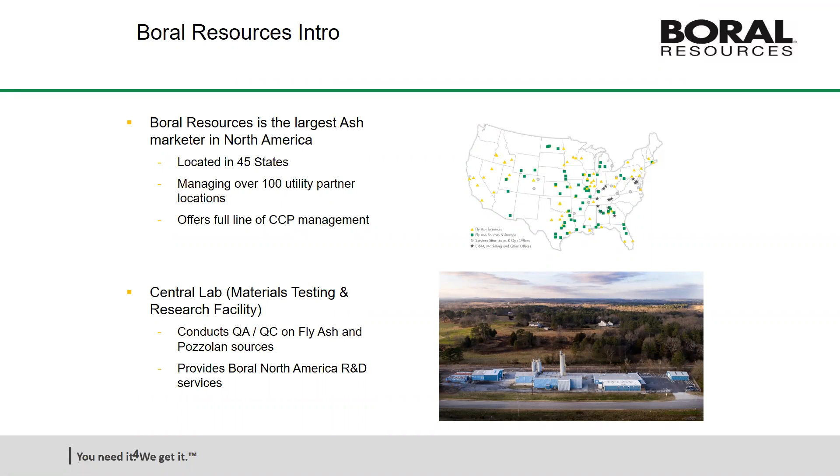Somebody's got some background there. I don't know if everybody's hearing me okay.

We conduct all the QA/QC on the fly ash and any pozzolan sources we have in North America. Also, it houses our R&D department, which is in charge of looking at new sources, harvesting potentials, and beneficiation of marginal or unusable ashes by process. When we talk about the use of fly ash in concrete, typically it's between 10 and 15, maybe 25%, depending on the application and desired properties.

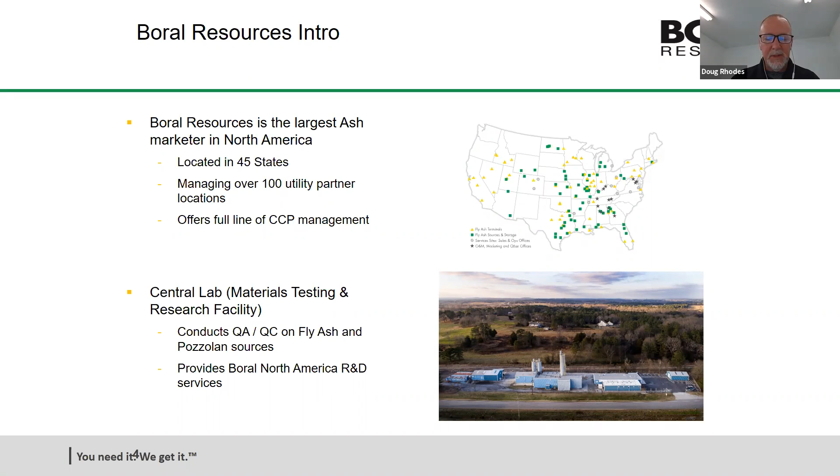If you don't know anything about fly ash, it provides a lot of durability attributes to the end product in the arena of sulfate soundness, ASR reduction, or just decreased permeability if that's what you're looking for. Carbon emissions are reduced proportionately to the replacement of the Portland cement in the concrete. And I got a little bit of a description on the next slide.

Well, you probably heard there's no fly ash, or fly ash is running out. We can't get fly ash. Well, yeah, that's true. And in some regional areas, there are intermittent supplies.

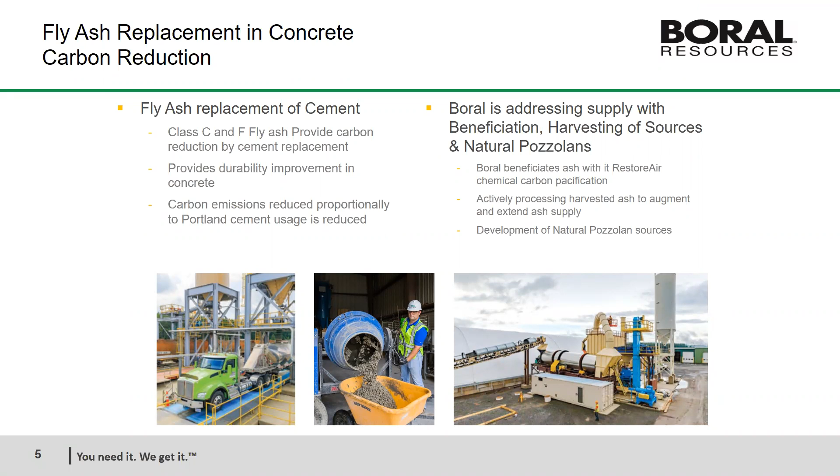Boral has been working for the last 5 to 10 years to secure harvesting sites, promote some natural pozzolan sources, and also working with beneficiation processes where we have a higher carbon content in ash, and we use a proprietary chemical called RestoreAir to render that carbon inert and allow its use in concrete.

And to the harvesting point, we've got 2 active harvest sites in North America that are working right now, and we're developing a natural pozzolan source in Arizona, and looking at several locations where that could be utilized.

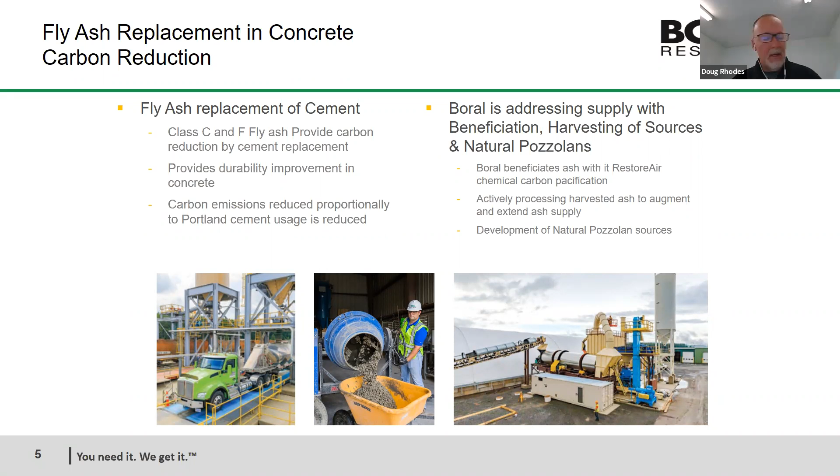Yeah, thank you for whoever's clicking that slide for me.

This is a sustainability report, kind of the big bullet points from our 2019. Our year goes June to June, so the next one will be out soon. In 2019, we sold roughly 7 million tons of fly ash, and the replacement factor is generally 1-to-1 with cement. Sometimes it's a little bit of a different ratio, but typically it's in that arena. If you're a concrete guy, the volumetric stuff comes into the equation.

On that basis, 1 ton of cement will produce 1 ton of carbon emissions from the Portland cement replacement. So for every million tons we can bring to market, replacing it on a 1-to-1 basis, with Portland cement with fly ash, we can avoid 0.7 to 1 million tons of CO2 emitted. Again, our strategy is to increase the amount of pozzolans available to you, whether it's fly ash or natural pozzolans, to replace that Portland cement on a 1-to-1 basis or whatever the ratio is.

There are challenges that surround that from a business standpoint. It's very capital intensive. If you're having to mill a material, like in a natural pozzolan scenario, the mills are quite expensive. The facility we're building in Arizona is going to have a very high volume output. That's to be determined after a couple more studies, but it should supply a great deal of pozzolan over the expected 25 to 30 year lifespan.

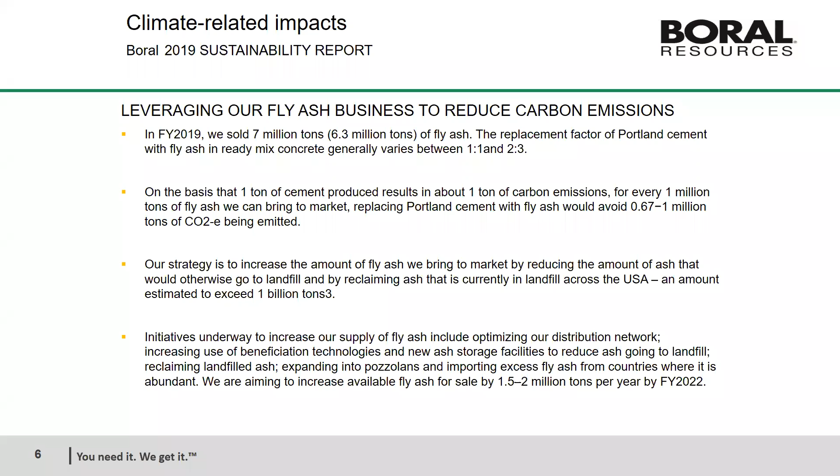So our goal is to increase the amount of pozzolans that we sell year over year, and our R&D department's working hand in glove with our sales staff to make sure that they can handle what we produce. And I think I've got about 30 seconds left, so that's kind of where I'm at.

Very good, Doug. Thank you. One comment for everybody on the call: fly ash. One role that everybody here can play, because we all want to be end users of fly ash, is to put a little pressure on these private industry companies to consider beneficiating their ash versus landfilling it, and working with companies like Doug's to put that technology in place.

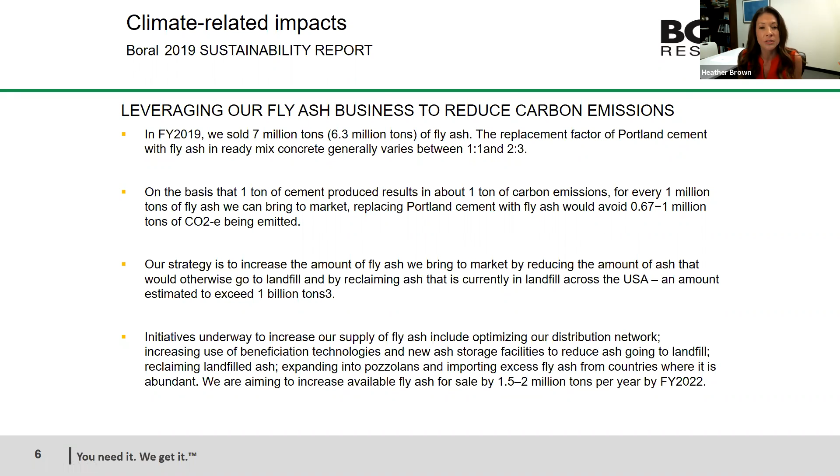The technology exists, the equipment exists to convert, let's say, bad ash to good ash, if you will. And it's companies like Boral that are out there looking for sources. It's easy for a private industry to build a landfill and just kind of do away with the problem immediately. So just wanted to comment there.

Thank you. Yeah, it's tough to dive into the weeds with 7 minutes. Thank you so much, Doug.

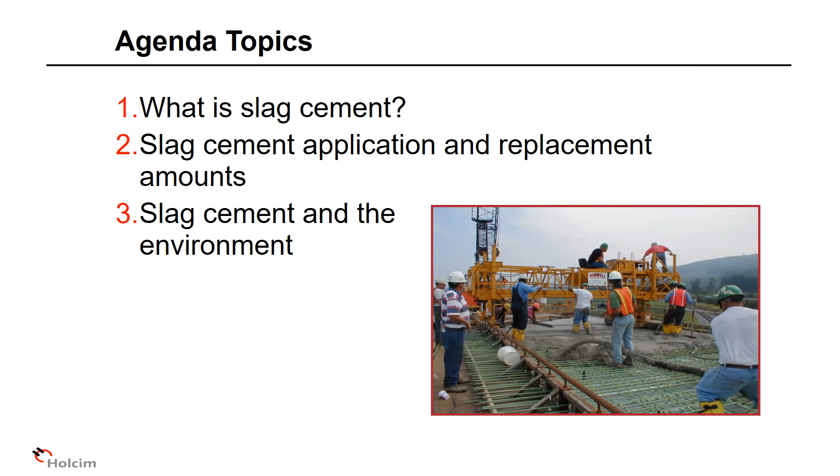One of the products we market in the area is slag cement, and the product is made in South Chicago and brought to Nashville by barge to our terminals. I'd like to hit on a couple things. What is slag cement? Slag cement in concrete, and then how does it affect the environment?

So the main thing about slag cement is it is a byproduct of iron production. It's the product that comes off the top during iron production. The product is then quenched and then ground to a fine powder.

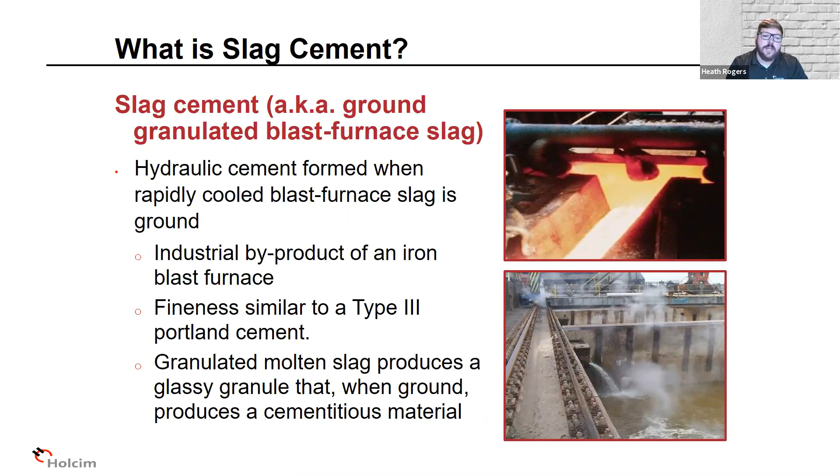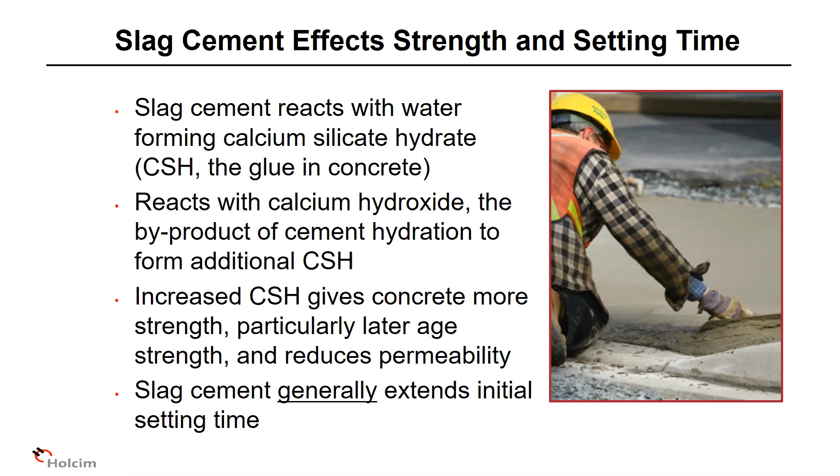Slag cement can then be used in concrete to replace some of the Portland cement in the mixture. So when you look at Portland cement in really small detail, basically whenever water hits it, it grows fingers, and that's how it gains strength. It grows this calcium silicate hydrate, and all that interlocks with the aggregate and the other cement around it.

Slag cement has the same mechanism. It grows these calcium silicate hydrate fingers, and there's also some synergies with the Portland that is available. So you get a nice, dense, strong paste structure when using slag cement.

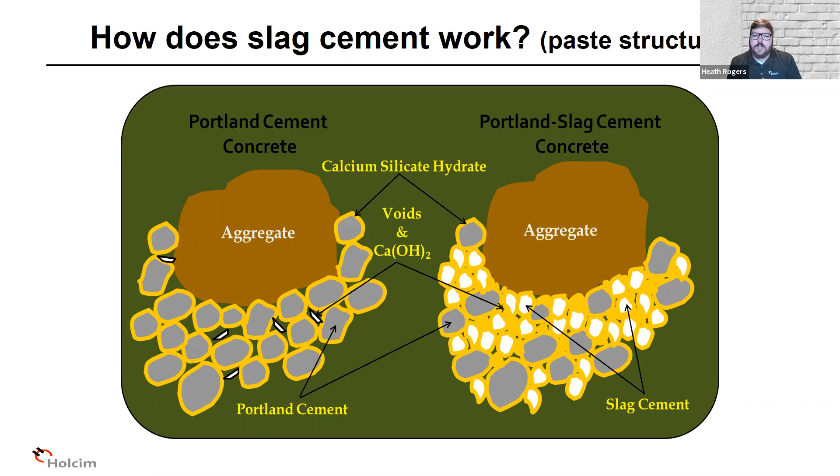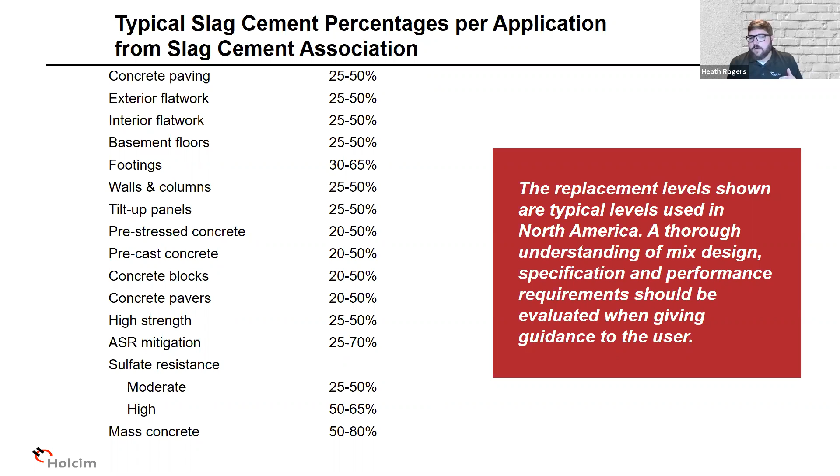So how's it used in concrete? The Slag Cement Association put out a chart basically showing typical usage in certain types of mixes. So the main thing I would like you to take away from this is slag cement is flexible. It's not a one-size-fits-all approach to different concrete mixes. It can be adjusted depending on the properties that you're seeking. So you can go with a smaller amount for concrete paving or a much higher amount for mass concrete, depending on the properties that you're looking for.

So how does slag cement help the environment? The main thing would be you are able to reduce virgin material usage. You can divert an industrial waste byproduct from the waste stream and improve service life, which is that durability, strong paste matrix that we talked about. And then we can reduce the embodied energy and greenhouse gas emissions and lighten the color of concrete.

So that lighter color of concrete comes into play when you're looking at LEED design and also the heat island effect of concrete in urban areas. So it's more reflective of the heat that is coming in. So let's look a little bit closer at reducing the embodied energy. Next slide, please.

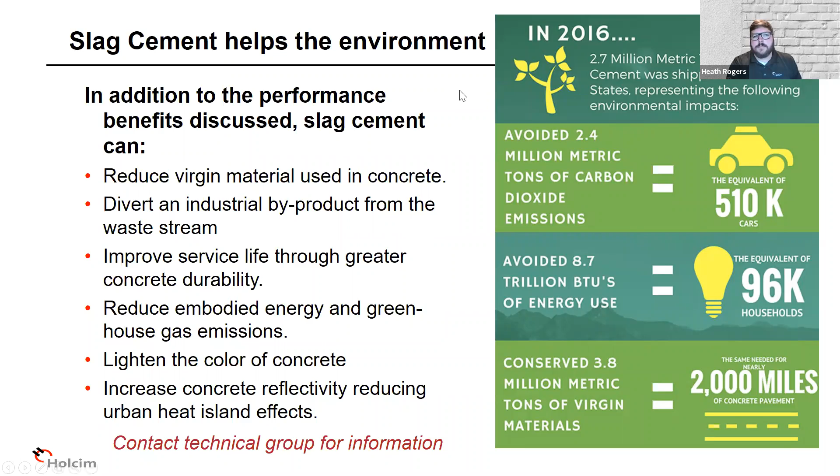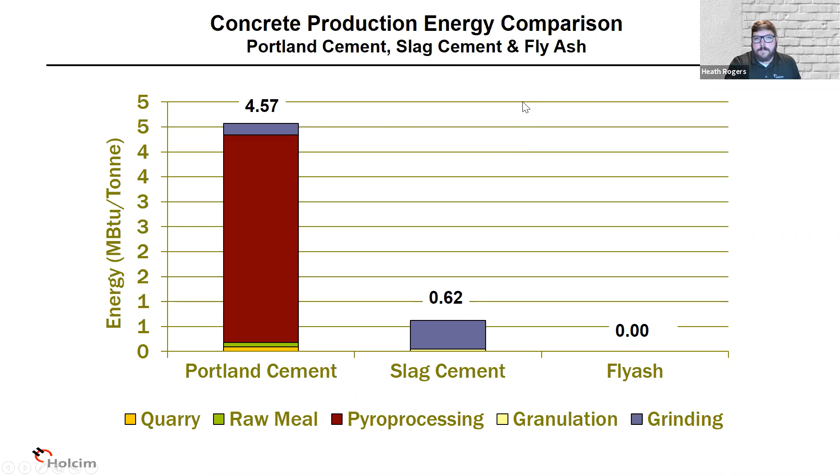So the Slag Cement Association did some testing. They put together 4 concrete mixes and how much energy was used to make those concrete mixes, the total energy used. They looked at a 3,000 PSI, a 5,000 PSI, and a 7,500 PSI precast mix, and then a block mix. If you go to the next slide,

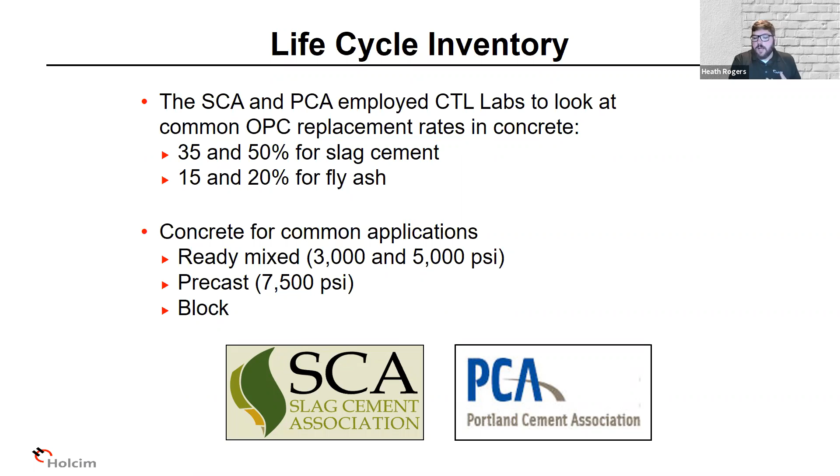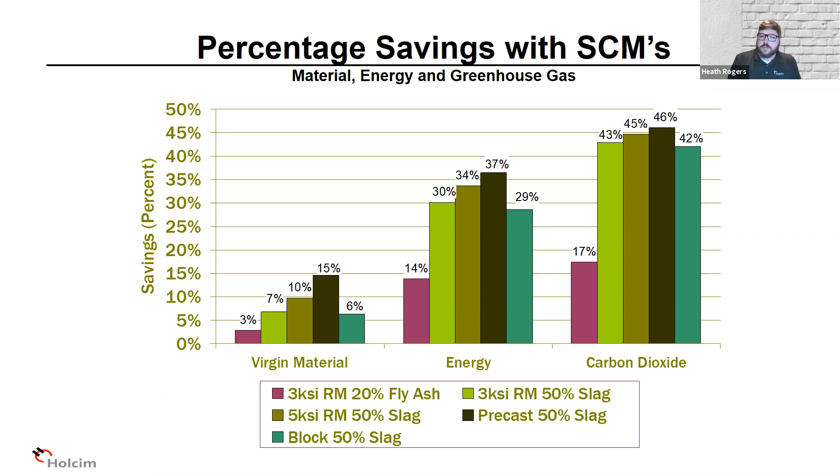you can see basically the savings of virgin material, energy, and carbon dioxide by replacing some of the Portland cement with a supplementary cementitious material. This chart is showing fly ash and slag; there are other things you can do, as we're going to talk about today.

If you would like to do a little bit more research, the Slag Cement Association has some great information on their website, slagcement.org. Two key places I'd like you to look: the sustainability tab, next slide please, has a life cycle assessment calculator. It has LEED certification information and an environmental product declaration, an EPD, for slag. So that's somewhere good to go for some of the information we're talking about today.

Second, the resources tab shows the slag cement information sheets. Next slide, please. It has 2 to 3 page documents about a lot of different information that relates to slag cement. So if you've got a question about slag, how it would play into concrete, how it would interact with something, this is a great resource to start. You can also contact me if you have any questions.

So thanks. Thank you, Heath. That was wonderful on the resources. I appreciate the extra science insight too. Look at you talking about calcium silicate hydrate.

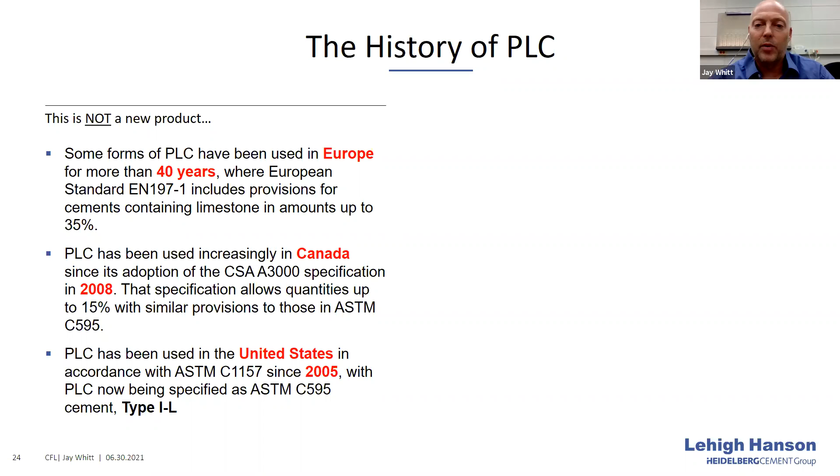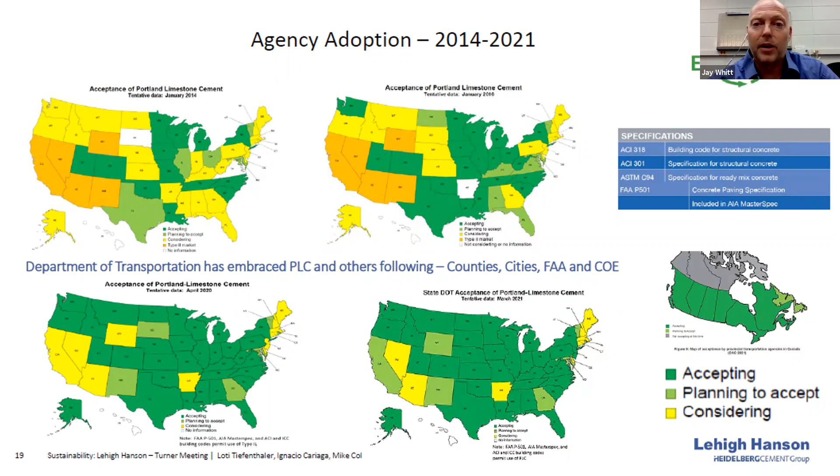If we look to our neighbors in the north in Canada, they have fully embraced this, such that we have one particular plant where all they produce is a type 1L cement. And projects moving forward that are federally funded in Canada have to implement type 1L.

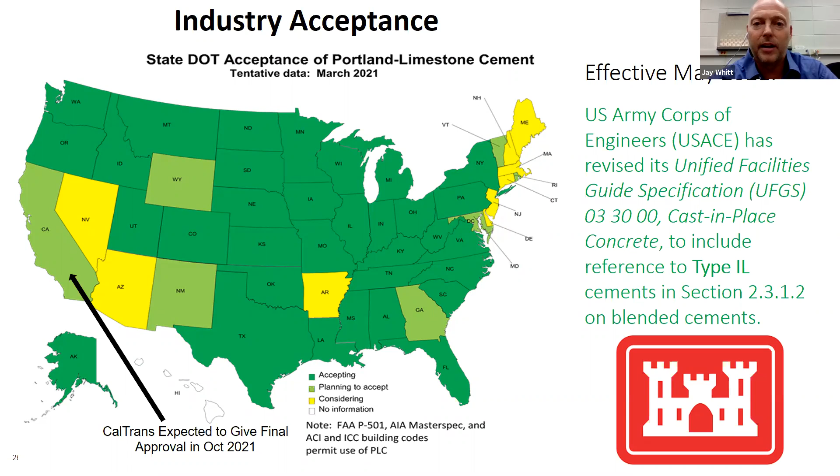One other note here, the Army Corps has embraced it here just recently in May. And then in California, they are almost on board. They have finished some research they've done, and in October, we expect to see that in their specifications.

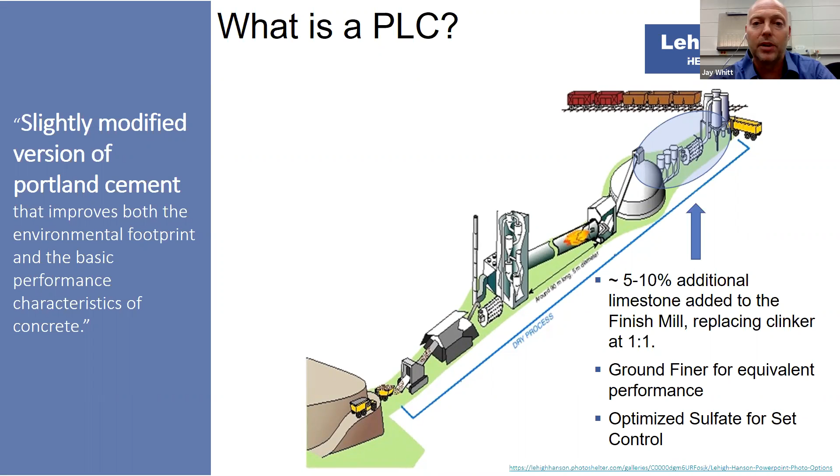So really, what is PLC, Portland limestone cement? You may hear it that way, or you may hear it as a Type 1L. It's a slightly modified version of our Portland cement. And what do I mean by slightly modified? Well, we're actually adding increased limestone percentage, about 5 to 10% in there. We're grinding it a little bit finer, but we're putting this into the process at the finish mills in the cement manufacturer. We're optimizing sulfate for set, and we're ready to go.

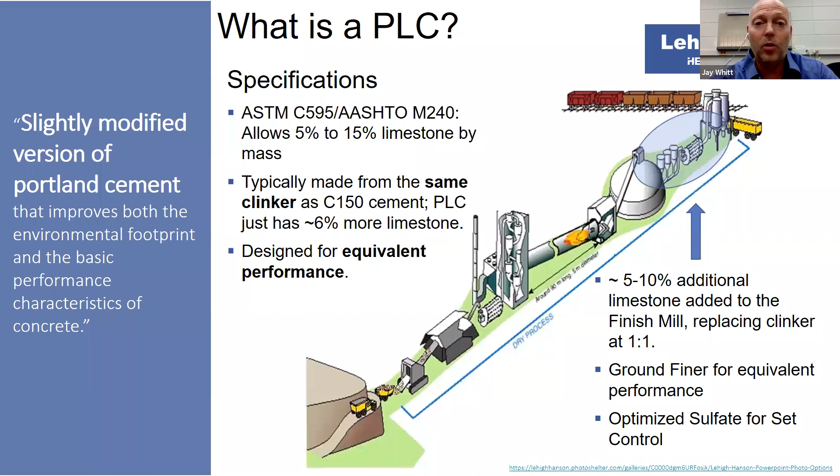Where are you going to see these specifications? ASTM C595 and AASHTO M240. And where are the clinkers coming from? Well, we're using the same clinker we're using for Type 1. Our main goal as a cement manufacturer is to have equivalent performance.

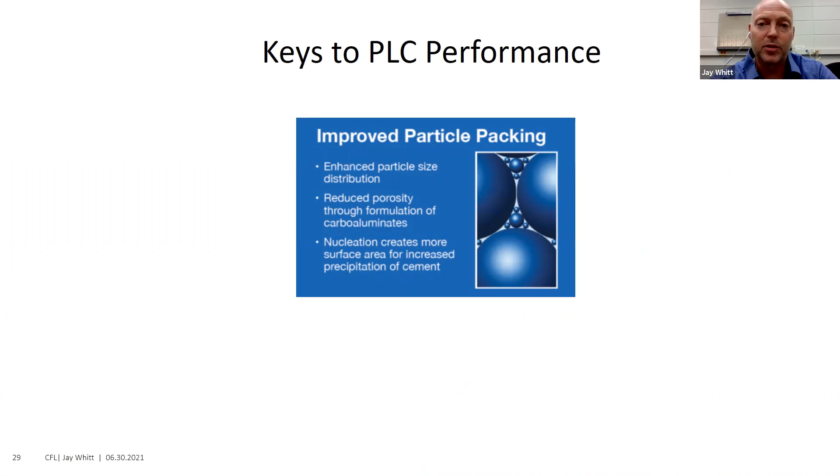And how do we do this? There's basically 3 mechanisms that we look towards. One is particle size. The other 2 are based upon chemistry and how the interaction happens at that micro level. From particle size, it's real easy to get caught up in this, but limestone is a little bit easier to grind and allows us greater distribution, which greatly helps not only the finish from a physical point of view, but also from a chemistry point of view. From a chemistry point of view, we can get really into detail, but the carboaluminates are going to help with the hydration of that cement.

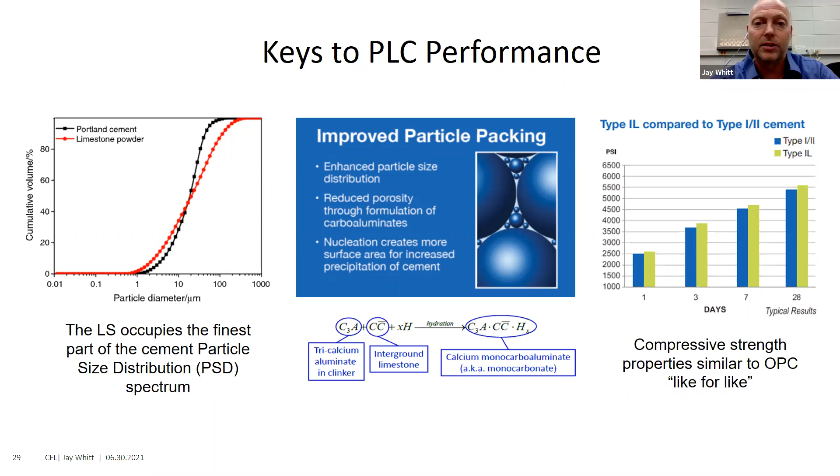What's it look like strength-wise? Most people, when they refer to it, mean compressive strength. Well, we got very similar results, and we use this term like-for-like, and it's not just the compressive strength, but also flexural strengths and all the durability testing, as far as shrinkage, ASR, and sulfate resistance. We are seeing a like-for-like performance.

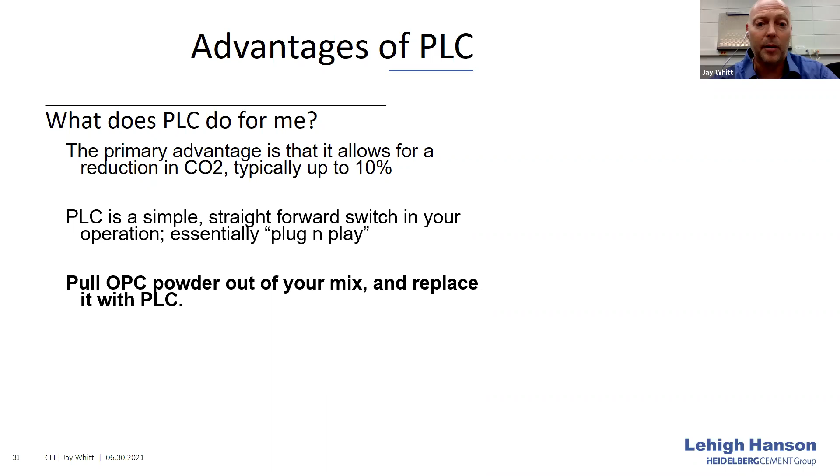What kind of advantages does this Type 1L give us? Well, the primary advantage is we're reducing our CO2. We are reducing that carbon footprint, typically up to 9 to 10%. But the practical side of me asks, what are the ready mix guys looking at? How do they change this? We like this because they're simply using the same material, the same equipment, the same batch programs, the same mix design. We may only see a slight change in our admixture dosage, but other than that, it's a plug and play aspect. There's no new equipment needed for this.

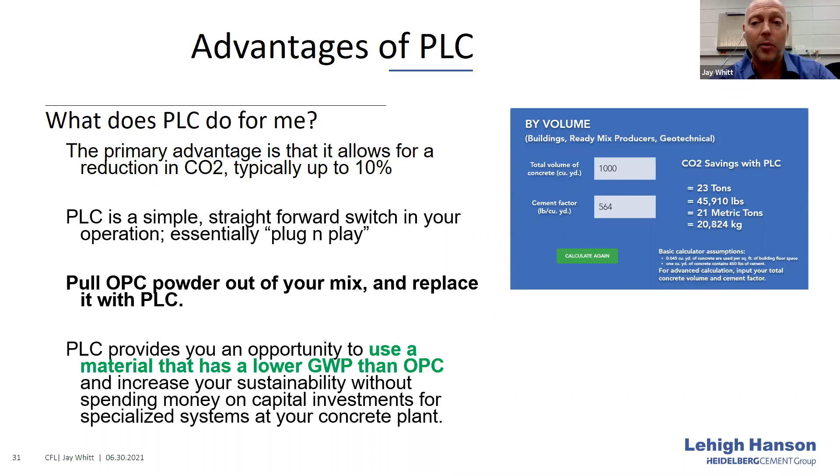So the next concept we talk about is GWP. Well, how do we quantify that? What gets measured gets improved. On a website called greenercement.com, we're able to adjust and modify and see the comparison. In this comparison off to the right is a 564 mix. We actually saved 21 metric tons using the Type 1L. Well, what does that really mean? To me, you've got to quantify it over several years. They quantified it over 2012 to 2018. We actually took 70,000 passenger vehicles off the road by using this product.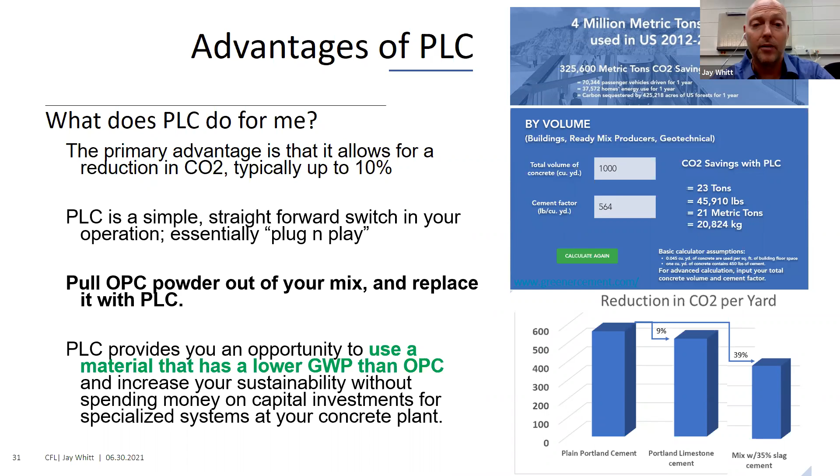Where are we using this? We, as Lehigh, have already implemented projects; we've got one dating back to 2010 where we have a terminal and silos built. We have roads that have been in existence since 2010. There's one in Iowa and in the Denver, Colorado area where we have seen this product already being implemented.

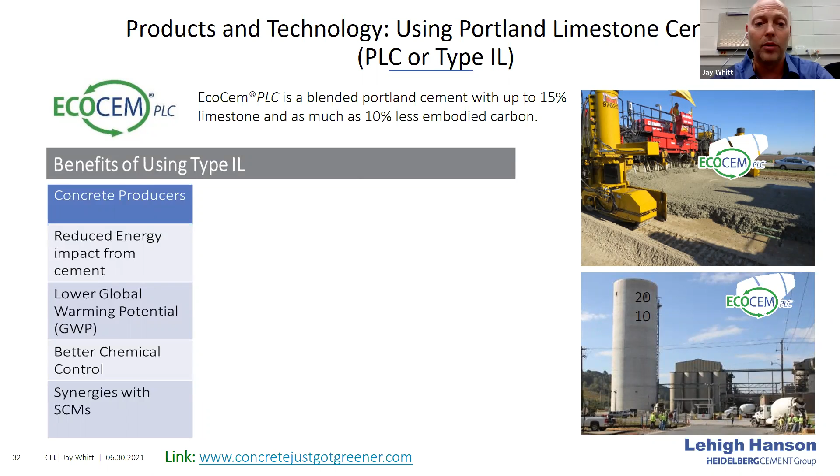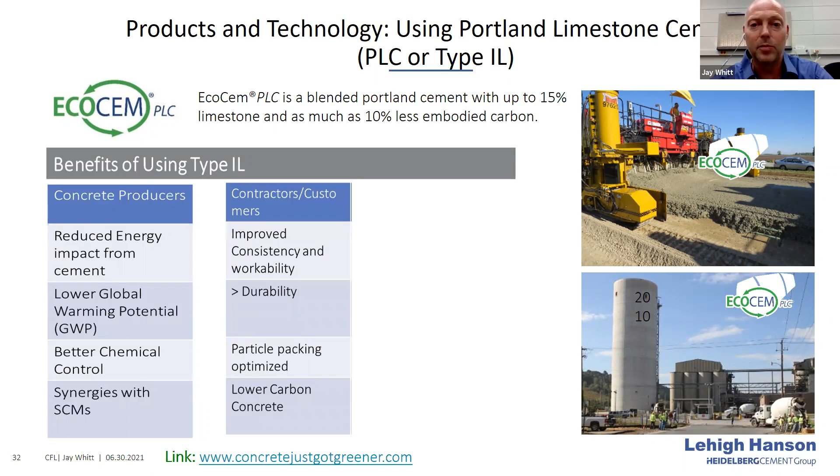From a concrete producer, what benefit does it have to us? The lower GWP. From a contractor's point of view, where does he see it? The main comment we get from contractors is, we like the finishability. So that's positive. They're not seeing too much change. From a public perspective, obviously we have fewer CO2 emissions.

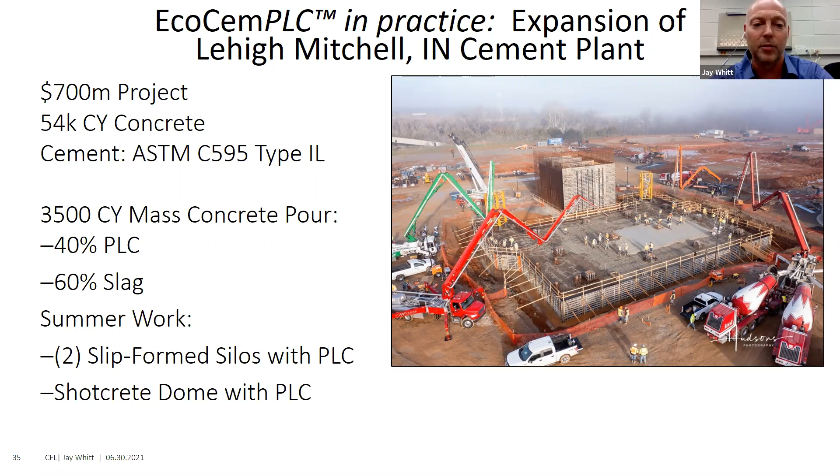How much do we believe in this product? We being Lehigh, and speaking from that perspective. We have started our new plant expansion in Mitchell, Indiana, a $700 million expansion. We are utilizing this product right now this year. Mass pours have already been done, in excess of 3,500 to 4,000 yards of this, and we're using it in slipform applications. So we're pretty proud of this product. We could see this being implemented throughout the nation.

What resources? I've already mentioned greenercement.com. That is an excellent resource provided by industry representation that you can resort to. Got some great little videos, some short videos, so you don't get too distracted, but some good resources there. Appreciate the time. We're excited to see how this looks in the industry.

Thank you, Jay. One comment or question: can architects and engineers specify EcoCem in their greater Nashville projects today? Oh, yes, absolutely. We have that product available. It is regionalized right now, so you have to check your particular region. I know here in the Midwest, where I'm located, Ohio, Indiana, Kentucky, Illinois, we have that product available.

Excellent. Thank you. All right, next, I've got Allison Palmer. Allison is the Market Development Manager for CarbonCure Technologies. I'm sure many of you have been hearing about this company, and Allison's going to share the latest update. Hi, everyone. My name is Allison Palmer. I am the Midwest Market Development Manager for CarbonCure Technologies. So today, just going to talk about what the technology is and some of the expected results you can get from using it on some of your projects.

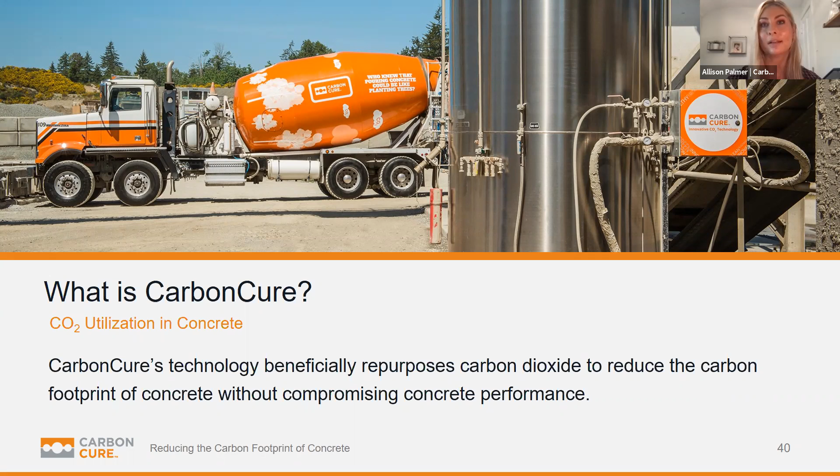So the use of CO2 mineralized concrete is growing rapidly across North America. We are in almost 400 concrete plants, been poured in 10 million cubic yards of concrete, resulting in 100,000 tons of CO2 saved to date. I'd also like to note we are in compliance with ASTM C494 Type S. I really just wanted to highlight that we've been used in a wide range of applications ranging from Canadian winters to Hawaiian summers, all very successful projects.

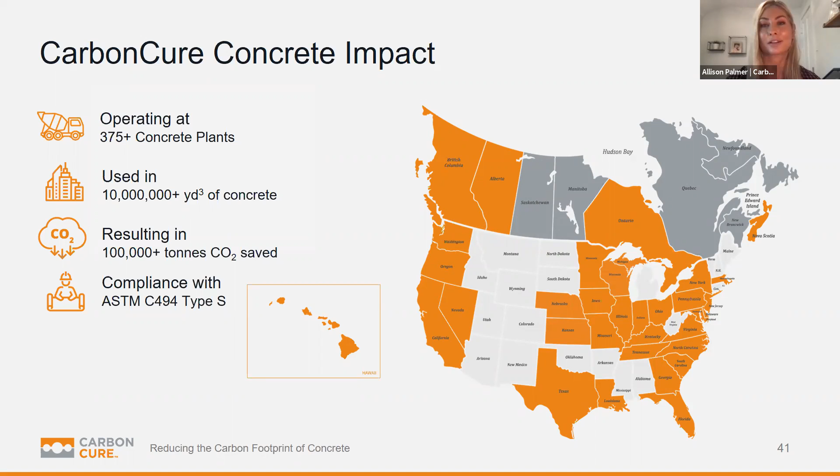So to understand our process of CO2 mineralization, we just need a 500-foot view of how cement is made. We start by mining limestone, AKA calcium carbonate, from a quarry. Heat that up to about 2,600 degrees, where that molecule will actually split in half. One half of that molecule is CO2, which is the waste byproduct. For every 1 ton of cement created, about 1 ton of CO2 is emitted. That's where we get 7% of CO2 emissions globally. The other half of that molecule is calcium oxide, which is the critical binding material needed to make cement.

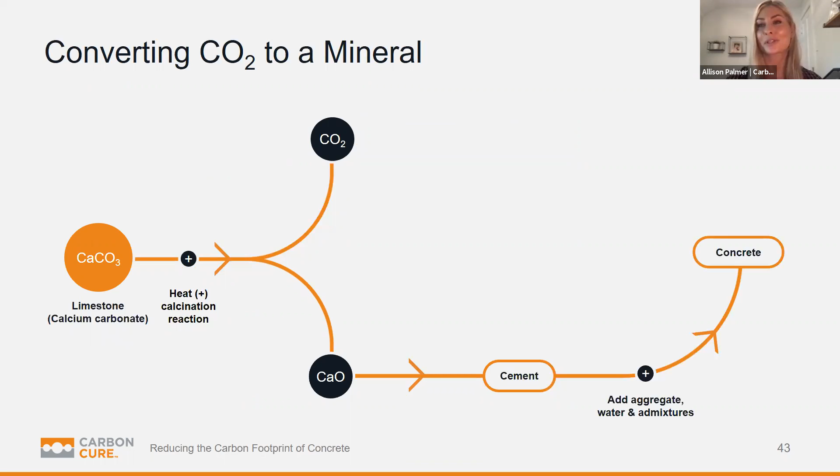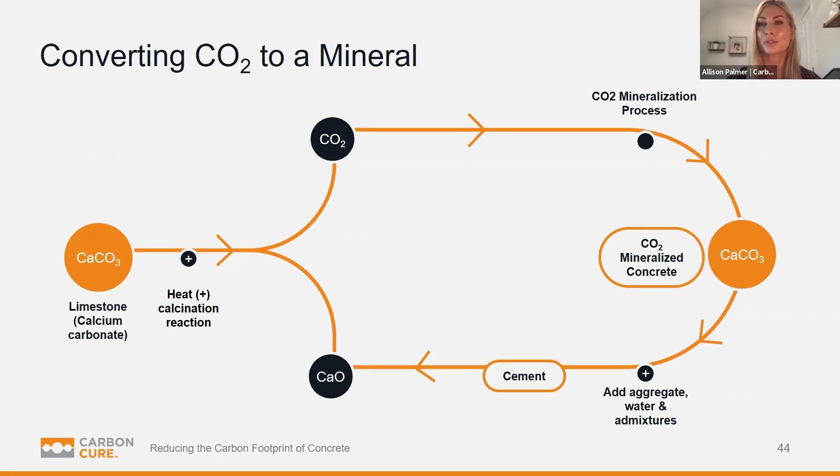Then cement is shipped off to our concrete partners that mix it with aggregates, water, admixtures, other SCMs to form our concrete. And now this is where CarbonCure comes in. We deliver a precise dose of CO2 into the concrete mix during mixing, just like any admixture. Once this happens, the CO2 enters the mix looking like dry ice or snow, warms up to room temperature, thus turning into a gas.

And once this happens, it's like a magnetic attraction that occurs between the CO2 and the calcium from the cement. These two molecules want to bind together and return to their original state of calcium carbonate, AKA limestone. So all we're doing at the end of the day is creating nano-sized limestone particles. And these are the reactions that increase the overall strength of our mixes, which allows us to reduce that cement content, like I mentioned in the beginning.

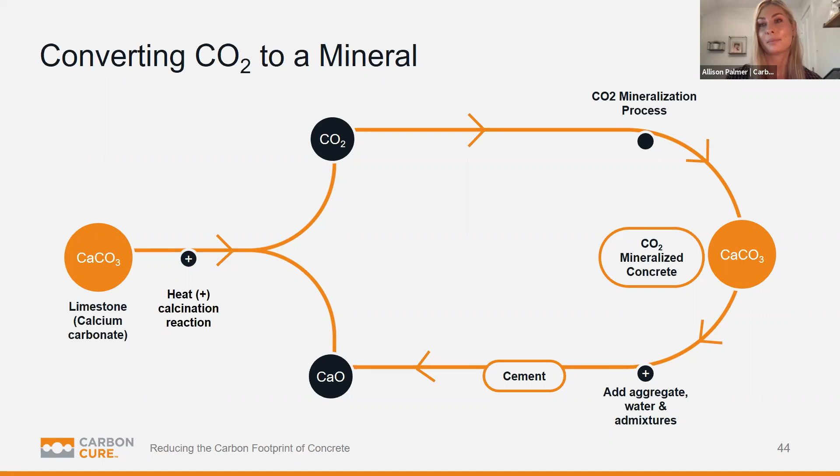And this is a really great example of an optimized mix. The QC team works closely with our technical services team to figure out how much cement they can take out of a particular mix while maintaining that same historical compressive strength.

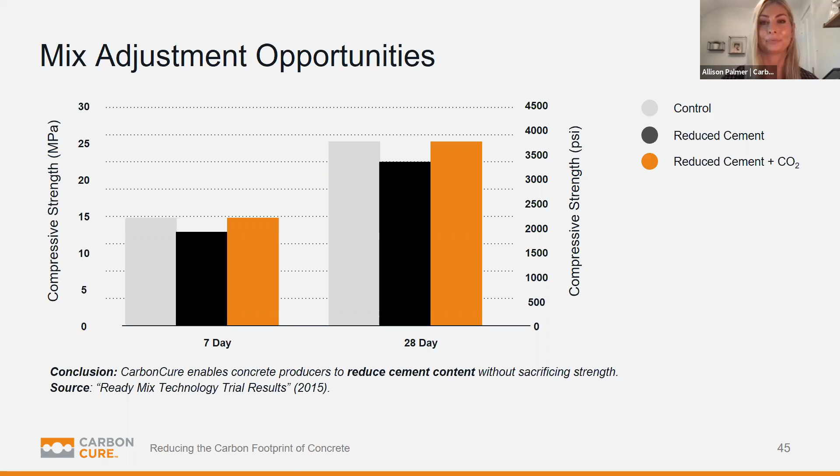So like I mentioned, CO2 has a neutral impact on the fresh and hardened properties of the concrete. In fact, if we didn't tell you CO2 was being used, you would not be able to tell. It has the same set time, workability, pumpability, temperature, finishing, no impact on air content, can be used with any admixture, aggregate, cement, SCM. Hardened properties like freeze thaw, pH, density, durability, and color are also unaffected.

So just to reiterate, CO2 has a neutral impact because we're injecting about 1 pound of CO2 per every cubic yard of concrete, which is about 4,000 pounds of material. That 1 pound of CO2 just wouldn't have an impact on temperature. It'd be like throwing a handful of ice cubes into the back of a freight truck and expecting it to cool off.

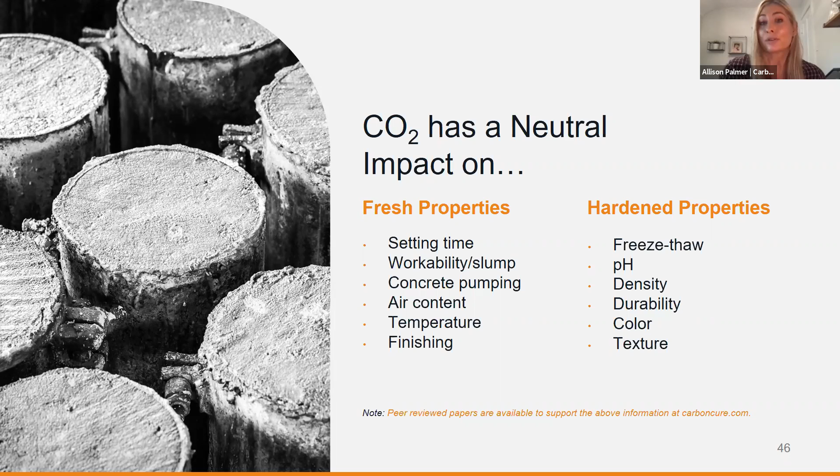So how much CO2 can be saved? At the end of the day, this process reduces approximately 25 pounds per cubic yard, but that figure can vary quite a bit depending upon the mix design. So the first way we calculate this figure is through that 1 pound that I mentioned that is injected, chemically converted, or in other words, sequestered. But the majority of the carbon savings come from the ability to reduce the cement content. So when we're reducing cement by about 5 to 6%, we're reducing about 20 to 40 pounds of material. So those savings can really add up on any given project.

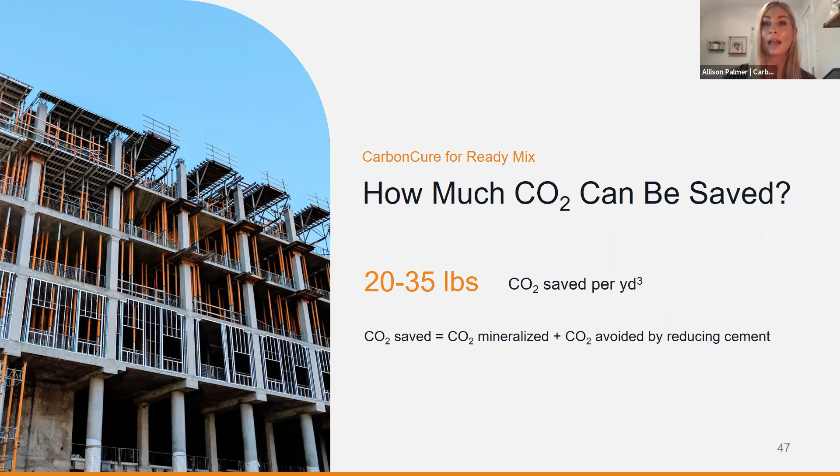If you're doing any sort of back of the napkin math, a safe figure to use would be 25 pounds per cubic yard. But we have a lot of information with our concrete partners. So we are able to provide a project carbon savings estimate if we have the estimate of cubic yards and mix designs being used on the project. So we can get a really accurate figure.

So just want to highlight a reference project here locally in Lebanon, Tennessee, a 225,000 square foot warehouse facility where IMI was the supplier. We saved 140,000 pounds of CO2 on this project from 8,250 cubic yards, which is the equivalent of about 82 acres of trees absorbing CO2 for a year. So as I said, these carbon savings can really add up on any given project. And I'd also like to note that no project is too small or too large.

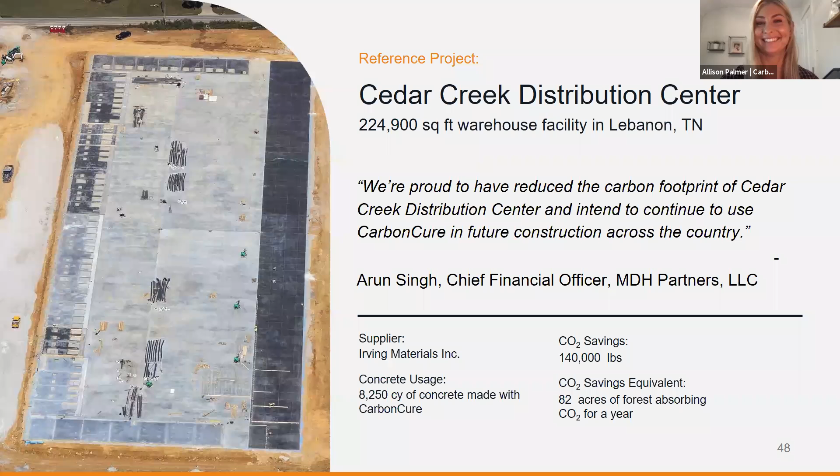So how can you help reduce concrete's carbon impact? Communicate your commitment to embodied carbon reduction throughout the supply chain early and often. So much of the time, we all have the same goal to reduce the carbon footprint on our projects, and we're just not communicating how to do that. Design strengths for what you need, and use SCMs, low carbon cement, recycled aggregates when available.

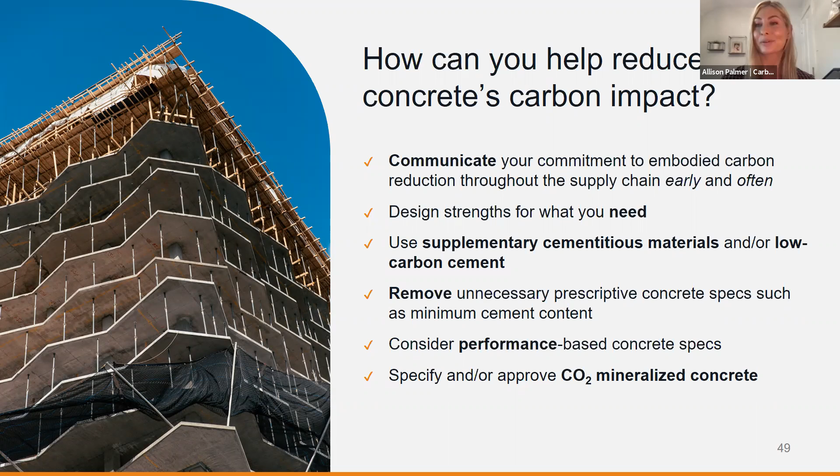And CarbonCure is not the catch-all solution here. We really want to advocate that you can layer our solution on top of other carbon reducing strategies. And we really welcome the opportunity to collaborate. Remove unnecessary prescriptive specs and move to a performance-based spec instead. And ideally specify and/or at least approve the use of CO2 mineralized concrete.

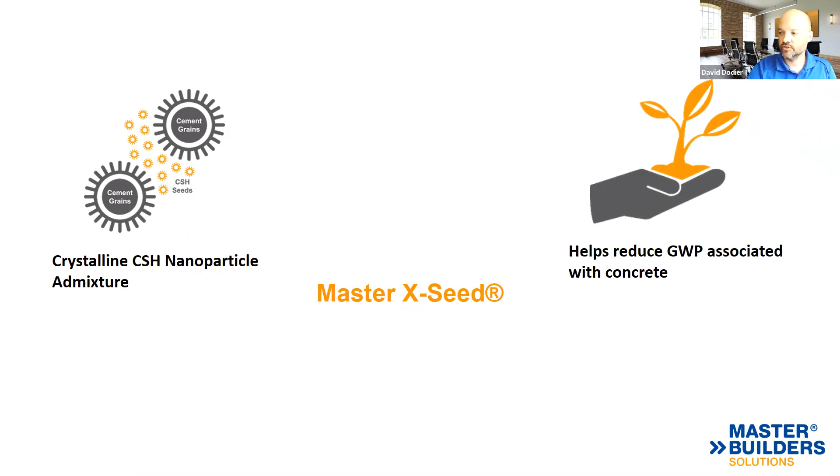What is Master X-Seed? Master X-Seed is a crystalline nanoparticle. It is a synthesized calcium silicate hydrate particle. So it acts in a mechanical fashion, versus some similar technologies that may act through a chemical reaction. So it acts through mechanical binding. Again, the Master X-Seed family helps reduce global warming potential of concrete, and they make a good pair. I will show you some examples later on.

With Master X-Seed, we have been able to successfully achieve carbon reduction between 5 and 40% using Master X-Seed by itself, or in certain situations in combination with other technologies and products in the market. Master X-Seed will help improve strength from 3,000 PSI concrete up to 14,000. And Master X-Seed products help improve concrete performance, allowing for higher level replacement of SCMs.

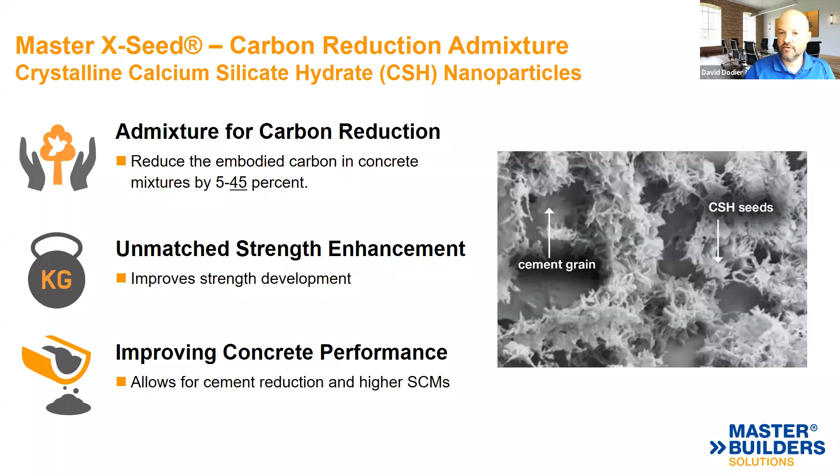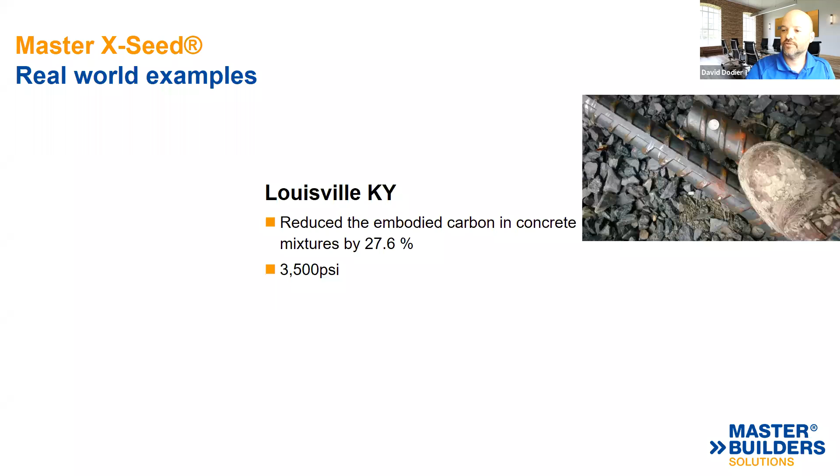So I'd like to show you a couple of real world examples using Master X-Seed product. There's one here, and this goes back to Jay's presentation. Like I said, you can use Master X-Seed product in combination with other technologies. This particular example is in combination with a PLC cement. With the combination of Master X-Seed and a PLC cement, we're able to achieve an embodied carbon reduction of 27.6%.

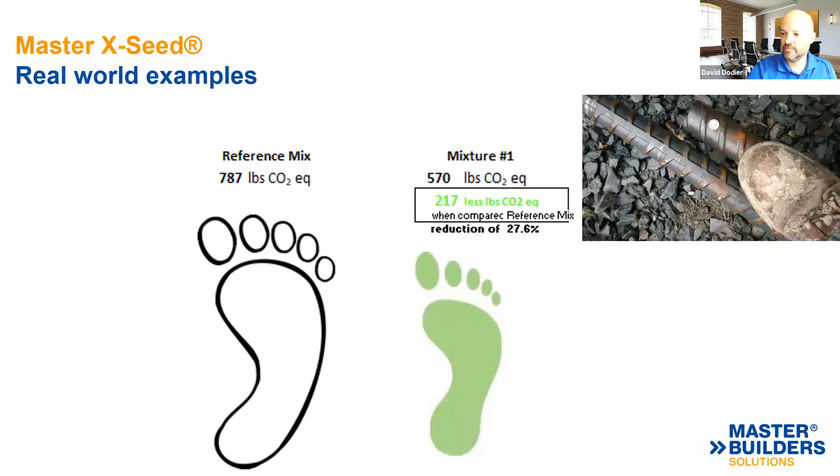That's based off of a reference mix, and with these calculations as far as how much carbon you can save, you have to choose your examples appropriately. So in this particular example, I used a straight 564 cement mix, which resulted in 217 pounds less CO2.

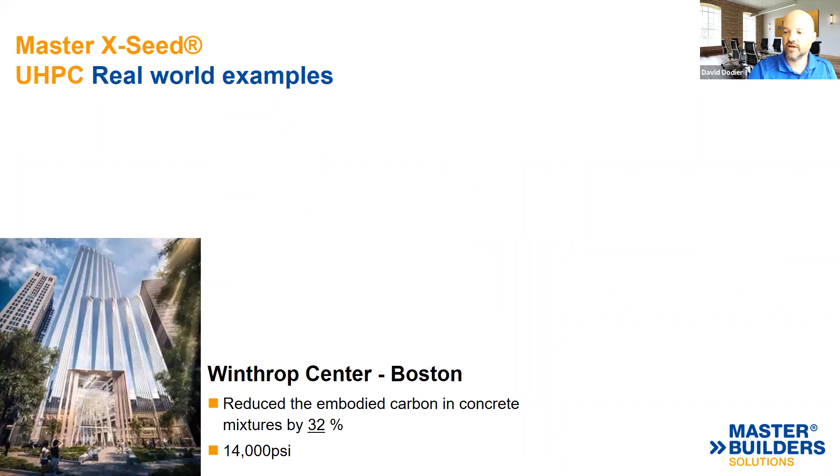I'll give you an example of an ultra high performance concrete. This example is the Winthrop Center in Boston, a 14,000 PSI mix design, where we reduced the embodied carbon in the concrete by 32%. This was using Master X-Seed in combination with some other technologies available in the market, resulting in 421 pounds less CO2 versus the reference mix. The reference mix in this example was taken out of the PCA Design and Control of Concrete Mixtures, a table in there referencing some high strength mixes.

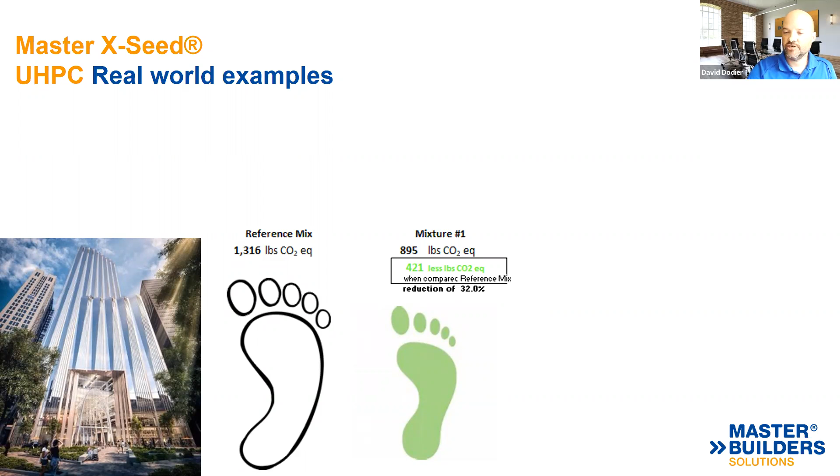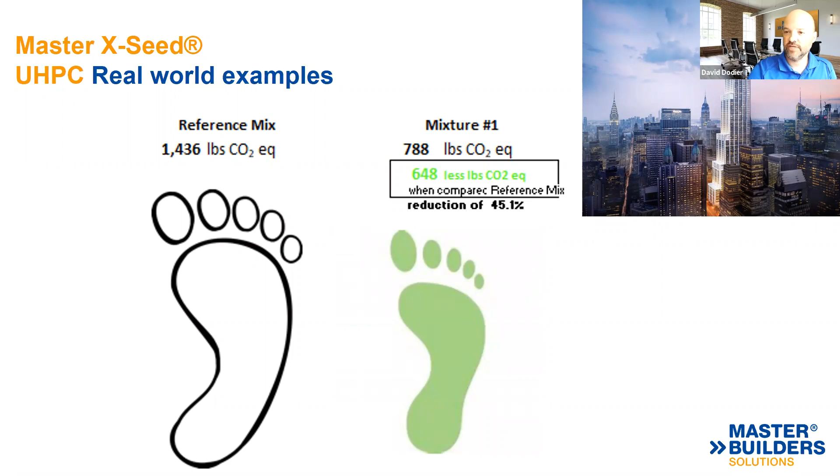And one more. Here's JP Morgan Chase in New York City. This is the largest one, where we reduced the embodied carbon of the concrete by 45.1% in 20,000 PSI concrete. The total reduction is 648 pounds less CO2. This is also in combination with other technologies, including Master X-Seed product. And that is all I have.

Thank you. David, thanks so much. Just to let the audience know, Master X-Seed is in the Middle Tennessee market now. You can reach out to some local suppliers, local producers, and they have that available. And there's lots of projects that we can highlight again in our September webinar to showcase some of those local savings. So thanks, David. Thank you, Heather.

Next, I have Joel Thornton. I mentioned earlier that we really look at concrete to have both current technology and emerging technology. Joel really represents a bright future for concrete. He's here with Aries Clean Technologies, and he's the business development manager. Yeah, thanks, Heather, and how you doing, guys? I just requested. I think I've got the control now.

All right, hey guys, I'm going to be giving a little bit of a different presentation for you today from the previous one. The speaker earlier from Boral did a pretty good job of explaining fly ash and its uses, but what I'm here to present is a technology called gasification, which has two byproducts. One is called synthetic gas, and the other is biochar, or as we've trademarked it, biofly ash. And we're currently exploring the use of the biofly ash as a sustainable substitute for fly ash.

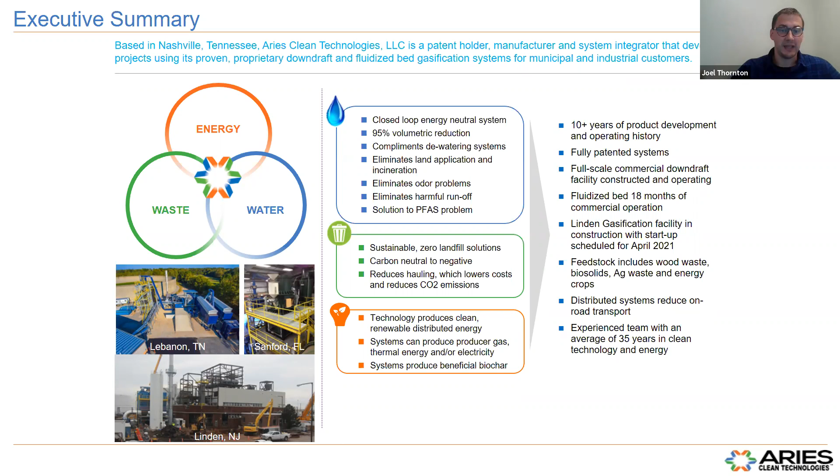And so what we do is we take that material as a raw feedstock in our process. I'll go through the process very quickly, and I know I've only got a few minutes, so I'm not going to go into too much detail, but effectively we receive biosolids. They're wet at this point. Wet means 25% solids content, so we need to dry them before we gasify. So we send those wet biosolids to rotary drum dryers, dry them to 90% solids content. At that point, they're suitable for input to the gasification process.

Now, the gasifier, I'll talk a little bit further about the process in a sec, but there are two main byproducts from gasification. As I said, one is syngas or synthetic gas, and the other is biochar or biofly ash, as we're kind of marketing it. Now, the syngas has heating value. It's not a lot, it's kind of a tenth of the energy content of natural gas.

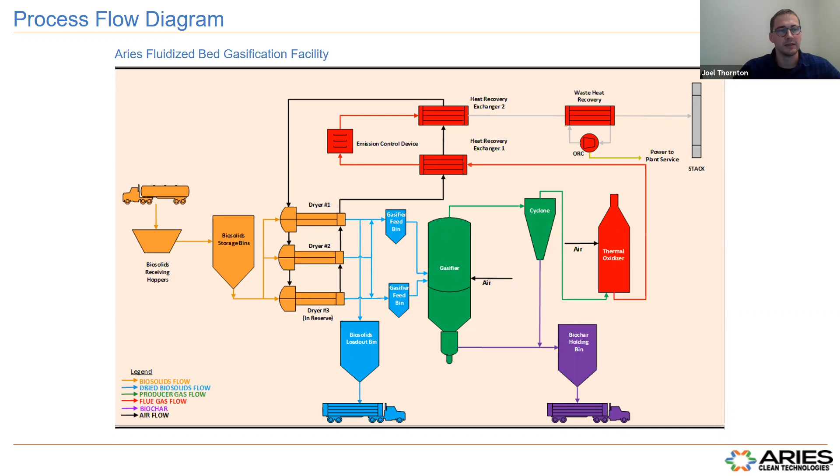But what we do is capture that, clean the particulate out, combust it, and then send that hot flue gas to a heat recovery system where we pull the thermal energy out and use the thermal energy to dry the incoming biosolids. So at that point, the system is a self-sustaining closed loop system, no natural gas or any fossil fuels during normal operations. And the only other byproduct, as I mentioned, is the biofly ash, which is where it ties into this conversation, which I'll go into in a second.

So what is the gasification process? Gasification, or fluidized bed gasification in particular, is a fully enclosed vessel with a bed of sand, just regular sand, in the bottom of the gasifier. We blow air through the bed. At a certain point, we hit what's known as fluidization velocity, and the sand then behaves like a fluid. We introduce some initial heat.

We introduce the biosolids at that point, and the reaction of the biosolids is effectively like a thermal decomposition process. So the biosolids start breaking down into their individual components, and they start reacting with each other. And that's what forms this producer gas or syngas. And then what's left over is the ash in the feedstock and the carbon. They resist that thermal degradation during the process, and then we can extract that carbon and ash mixture, which is what forms our biofly ash.

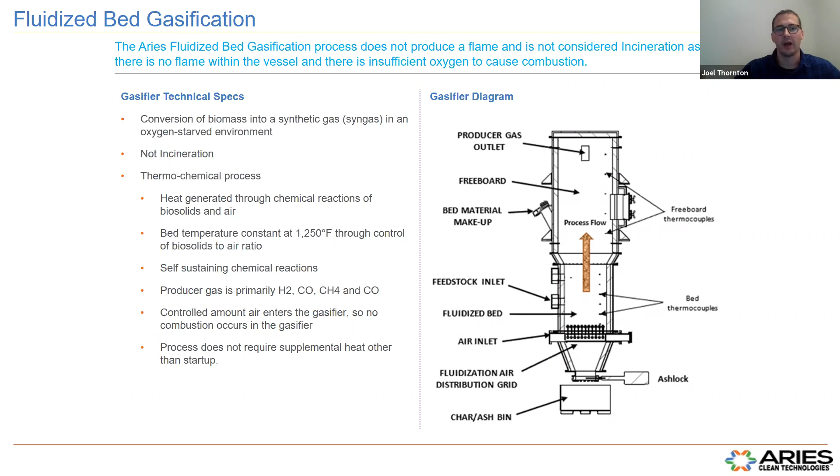So one thing to note is that it might sound like an incinerator, and if anyone's familiar with incinerators, they're very difficult to permit, and states and even other countries are cracking down on incineration. It's a big scary word, but the gasification process has been deemed by the EPA as not incineration. We went to them with our technology and got a ruling on gasification versus incineration, and they ruled that we were not an incinerator. So that certainly helps us with permitting and going into these new states.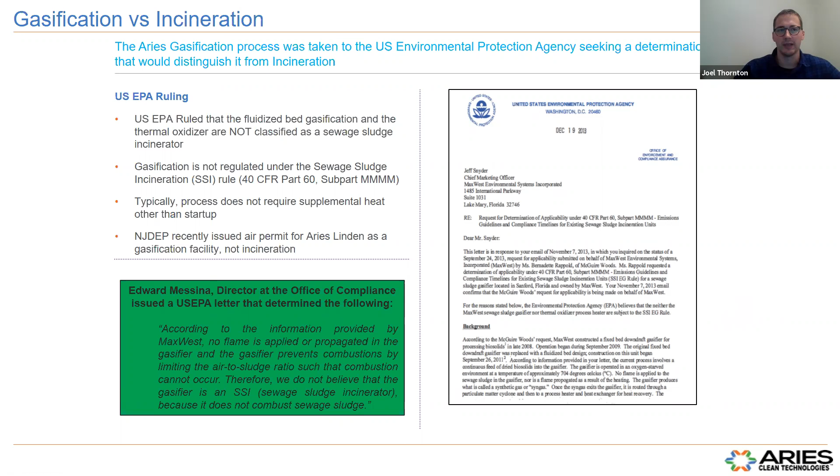So how does that tie into this conversation? As I said, biochar is the byproduct of gasification. It's a mixture of carbon and ash, which resists the thermal degradation in the gasification process. Depending on the feedstock, woody-based biomass has a much higher carbon content, much lower ash content, so you get a really high carbon biochar. That material we actually sell on Amazon as a soil amendment, but we have multiple other uses for it. We currently have a supply agreement with a textiles manufacturer that is using it in the manufacturing process of their textiles.

And then that leads me to the fluidized bed gasification, or the biofly ash. This stuff has a much lower carbon content, sort of 5 to 10% carbon. The rest is ash. And we've been working with the National University of Singapore; they've been doing tests on replacing fly ash with a mixture similar to this, with a small amount of carbon in it, and seeing good quality results in strength of concrete and the different concrete parameters. I'm no expert in concrete by any means, but they've shared some of those results with us.

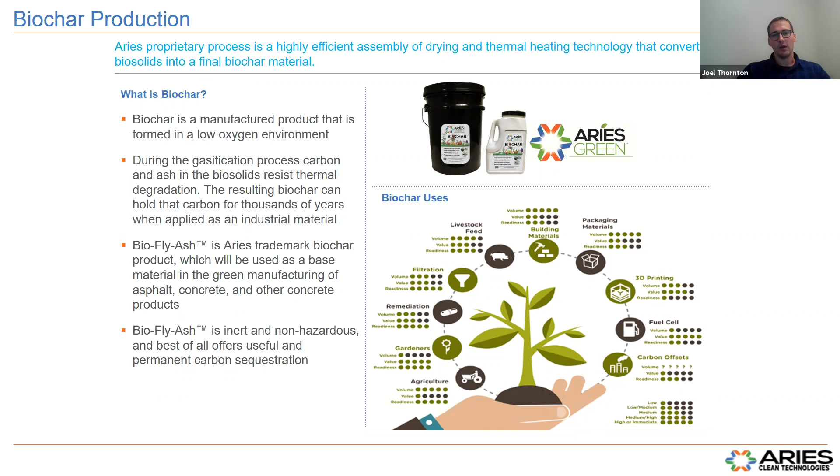So a little bit of history on this fluidized bed gasifier project. There was one operating in Sanford, Florida about 10 years ago. That plant actually ran out of money and shut down, and Aries bought the intellectual property out of bankruptcy. And so what we're doing now, which is kind of leading to my next slide, is we're implementing that same technology up in New Jersey, and we have a project that's just about to complete construction here in the next month or two in Linden, New Jersey.

We're going to be taking in 430 tons a day of biosolids, and the only output will be 22 tons per day of this biofly ash. Since we don't have a commercial plant up and running yet, we don't actually have the material to perform all the tests on our specific biofly ash. But as I mentioned, once this plant gets up and running in the next month or two, we're going to be sending that material out for testing, and we have a letter of intent with a concrete company to use it as a substitute for fly ash once they complete the necessary testing on the material once we actually have it.

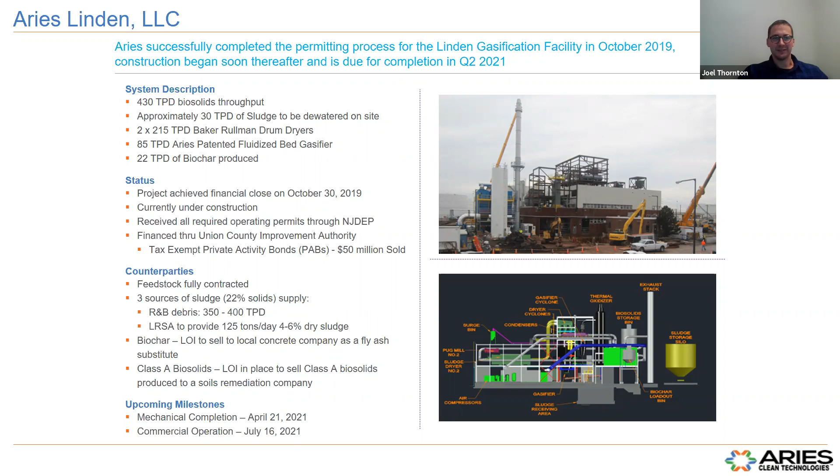So we're really excited about this plant getting online here in the next couple of months, and once we do, we hope to get these lab tests done and prove it out as a substitute for fly ash. So yeah, it's all hands on deck here at the moment, getting Linden finished. And once we do, hopefully we see some good results. And that's all I have.

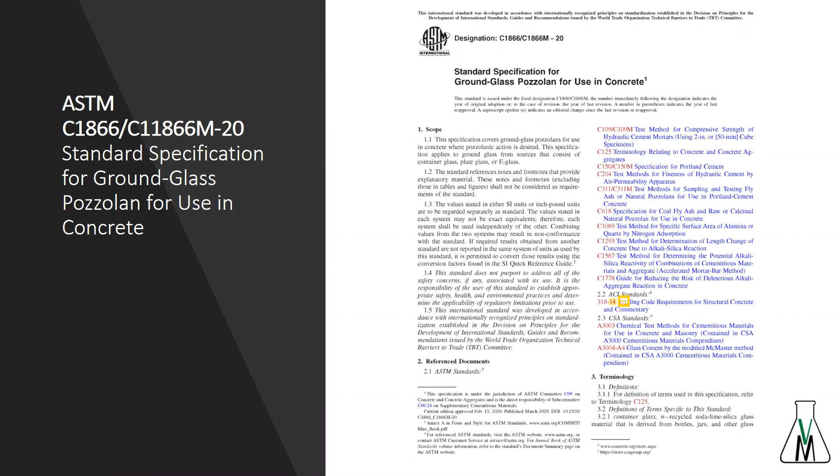So the glass pozzolan standard acknowledges two types of glass. One of them is called soda lime glass, which is GS, and that includes plate or bottle glass. Plate glass comes from windows, mostly sourced from post-industrial sources. Bottle glass comes from municipalities. And the second type is type GE, and that's a glass powder that's made from fiberglass reinforcements. So both materials as used as a pozzolan are extremely pure, and they will react a lot like Class F fly ash in your formulation. Let's look at the next one.

So when you look at the different chemistries of the glass pozzolans, the type GS have one unusual characteristic, and that is they have high alkali content. And this kind of prevents them from acting as mitigators of alkali silica reaction. However, the type GE glass has a very low alkali content, and it's an excellent pozzolan, can be used exactly like Class F fly ash, except that it's white instead of dark in color. Let's look at the next slide.

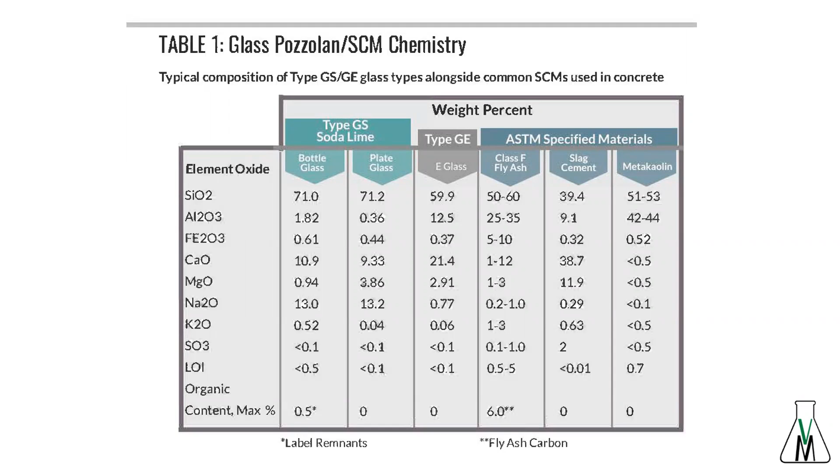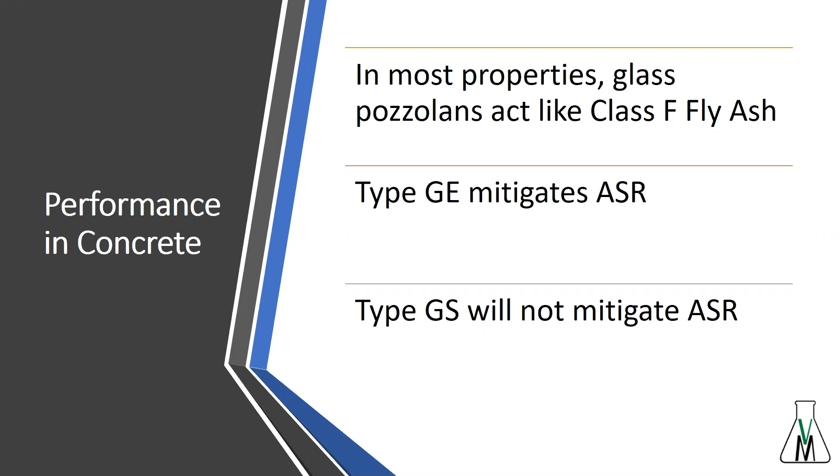So in most properties, glass pozzolans act exactly like Class F fly ash. You can load them at 20 to 30% cement replacement. It is a 1-for-1 replacement of cement. The embodied carbon of glass is a bit more than fly ash because we have to do somewhat more beneficiation, namely grinding it to convert it into the proper particle size. So let's look at the next slide.